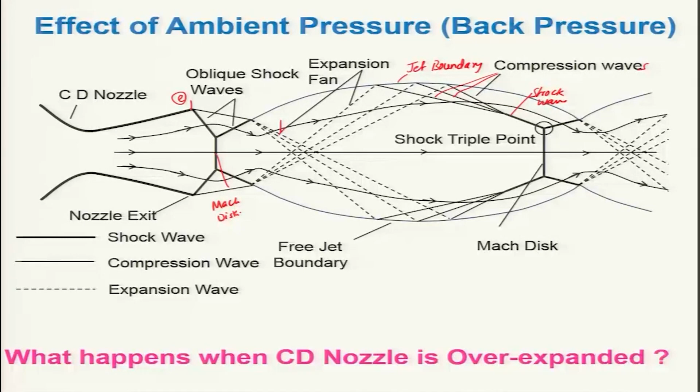expanded nozzle. So, one has to design in such a way that the over-expanded portion of the operation during its flight must be reduced, rather one will go for a little more under-expansion such that the losses will be minimized, and that is what is being done.

Now, let us look at what happens, because all this discussion we have done is considering that there is no boundary layer. However, there will be a boundary layer. It may be a very thin one, because the flow is accelerating, and this is your boundary layer. And when the shock is interacting with this boundary layer, as you know, pressure will be higher at the

downstream of the shock. So, there will be an adverse pressure gradient, and the boundary layer is more likely to be separated, such that there will be recirculation, and of course, in this condition the pressure will be such that it may have a higher thrust. However, this boundary layer separation may be asymmetric in nature, so that it will give you side thrust. So, this flow separation will be dependent on several parameters; let us look at them.

So, flow separation depends basically on the angle of divergence, the wall pressure, the local Mach number, and the local pressure gradient, and wall roughness also plays an important role for initiation of these boundary layer separations, particularly because wall roughness will affect the turbulence level. If the turbulence level is higher, then naturally the flow is less likely to separate, and it will bear the higher adverse pressure gradient. So, for that, of course,

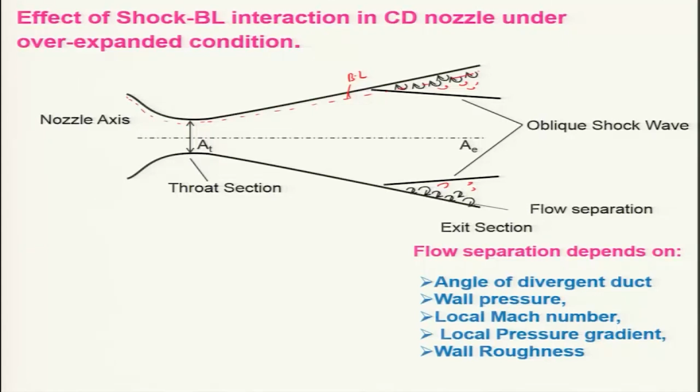while designing, a certain thumb rule is used, which is known as the Summerfield criterion for flow separation. That means PE by PA generally will be less than or equal to 0.4 to avoid flow separation, when PTE by PA, where PTE is basically PT2 at the reservoir, is greater than 16, for alpha, your nozzle angle, less than or equal to 30 degrees. If you look at this angle, this is alpha.

But this is a thumb rule, and it is also dependent on the local Mach number of the flow. So, therefore, people have conducted experiments and arrived at a semi-empirical criterion for flow separation, that is PE by PA is equal to 1.88 ME minus 1 to the power minus 0.64. That means basically it is 1 over that, so if Mach number is greater than 1, naturally this will be positive, so that the exit pressure will be less than PA.

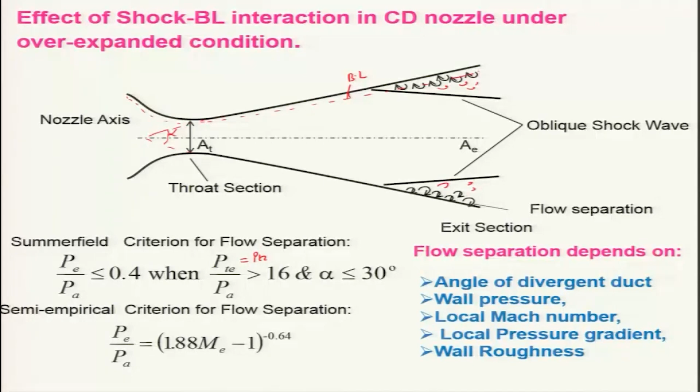This criterion is more robust as compared to the Summerfield criterion, but the Summerfield criterion is used as a thumb rule for preliminary design of the rocket nozzle, because you may not know the exit Mach number as such, so you can start with this, and maybe cross check whether it is doing well or not.

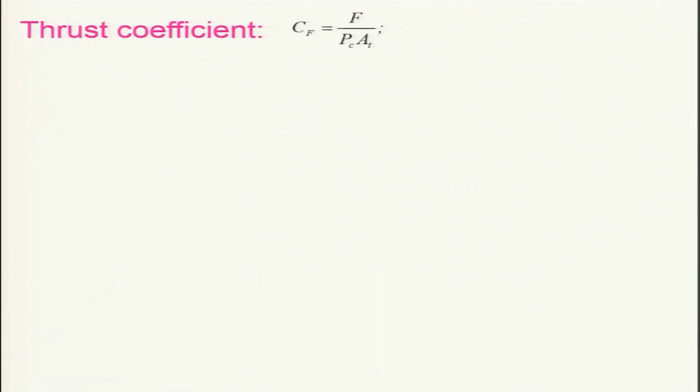So, let us now look at the thrust coefficient, what we had defined earlier. We know the thrust coefficient Cf is equal to the ratio of thrust divided by chamber pressure Pc and At, your throat area, and this At corresponds to the choked condition. So, let us recall the thrust equation for a rocket engine that we had derived earlier, that is the thrust F is equal to m dot P VE plus PE minus PA into the exit area of the nozzle.

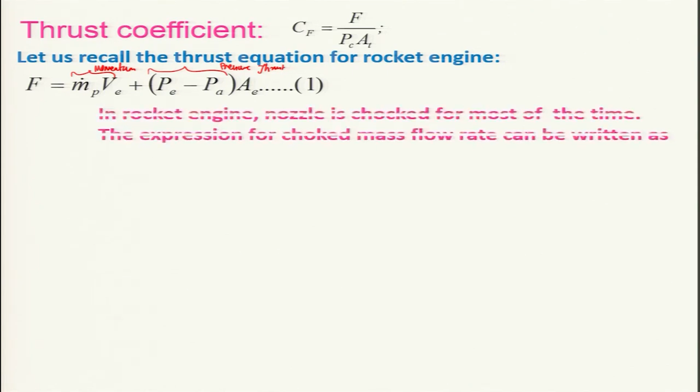So, this is basically momentum thrust, and this portion is your pressure thrust, as we have already discussed, and keep in mind that there is no inlet drag in this, or ram effect, because these are non-air breathing engines. And keep in mind that in the rocket engine, except during starting and shutting down, the nozzle is choked for most of the time.

The expression for the choked mass flow can be derived and written as m dot P is equal to PT2, the chamber pressure, times A star, your throat area at the choked condition. Keep in mind that under this condition the throat will attain Mach number 1, or sonic velocity, and this is aerodynamically choked, into root over gamma divided by root over R Tt2.

Tt2 is your chamber temperature, R is your specific gas constant, into 2 by gamma plus 1 to the power gamma plus 1 divided by 2 into gamma minus 1. This you can derive very easily, and we have already discussed isentropic flow through a variable area duct.

So, you can get very easily this expression, and we have already derived the exit velocity expression in terms of the temperature, that is 2 gamma Ru, Ru is your universal gas constant, Tt2, that is your chamber temperature, divided by gamma minus 1, m bar is basically molecular weight of the gas, into 1 minus Pe by Pt2 to the power gamma minus 1 divided by gamma. This expression we have already derived.

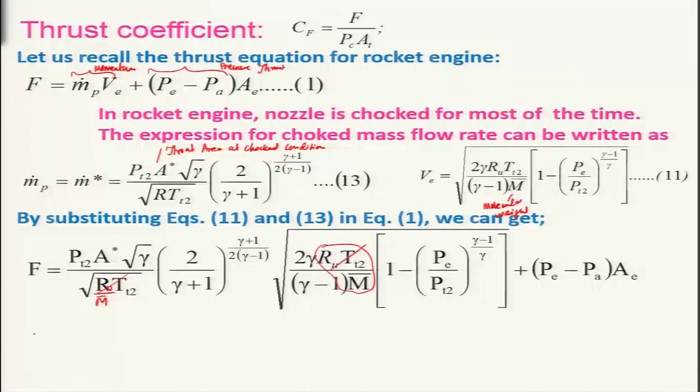And I can write that F is equal to Pt2 A star, and root over of that I can write as gamma, 2 by gamma plus 1, to the power gamma plus 1 by gamma minus 1, and this will be 2 gamma square by gamma minus 1, into 1 minus Pe by Pt2 to the power gamma minus 1 by gamma, plus Pe minus Pa term, and this is the expression you get here.

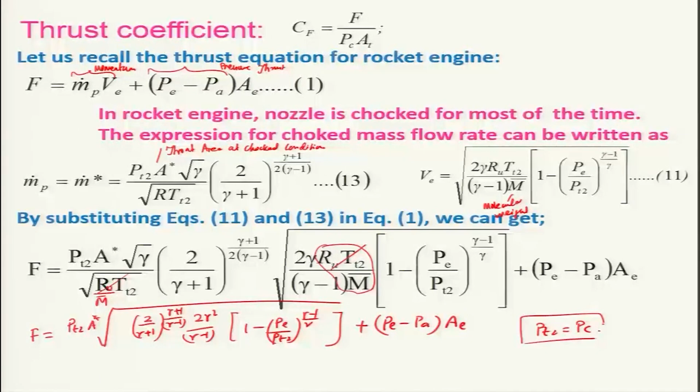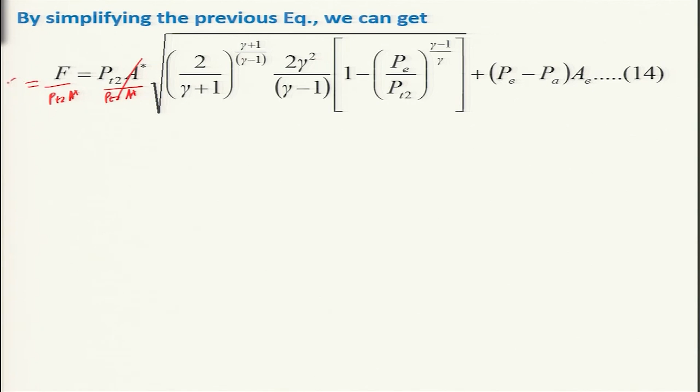We are going to find an expression for the thrust coefficient Cf. Cf becomes F divided by Pc A star, and keep in mind that Pt2 is equal to Pc, the chamber pressure. By doing that we can simplify this expression we have written previously. So, if I divide by Pt2 A star, it cancels here, and this is nothing but your Cf. We also have to do this here, that is Pt2 A star.

So, that becomes Cf, which is F divided by Pt2 A star, and this expression you already know, and this became Pe by Pt2 minus Pa by Pt2 into Ae by A star, which is also known as epsilon, the expansion ratio. Ae is the exit area of the CD nozzle, and A star is the throat area. You can see that Cf is a function of gamma, the pressure ratio Pe by Pt2, Pa by Pt2, and also Ae by A star.

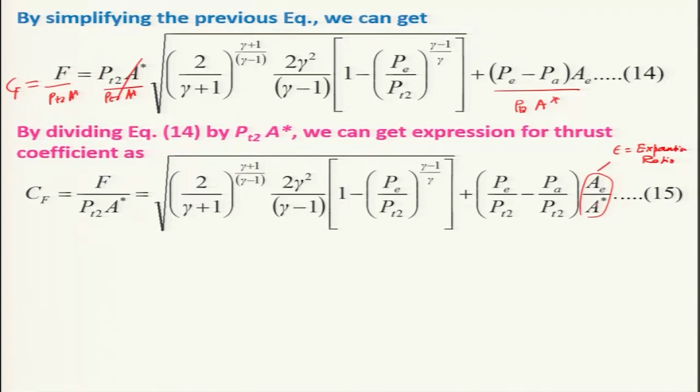This expression indicates the amplification of the thrust due to expansion in a CD nozzle as compared to the thrust if Pt2 acts on the throat area alone. For example, consider this CD nozzle with chamber pressure Pt2, and this is your throat area A star under choked conditions. This is the velocity coming here, such that Pt2 acts on this area A star, and that gives a thrust.

Due to this divergent duct, the thrust will increase, and that gives the amplification, how far it goes beyond what it would be if the pressure Pt2 acted over the throat area or choked area. So, this is the indicator of amplification of thrust. As I told earlier, Cf is a function of Pe by Pt2, the pressure ratio across the nozzle, the atmospheric pressure with respect to the chamber pressure, Ae by A star, the expansion ratio, and gamma.

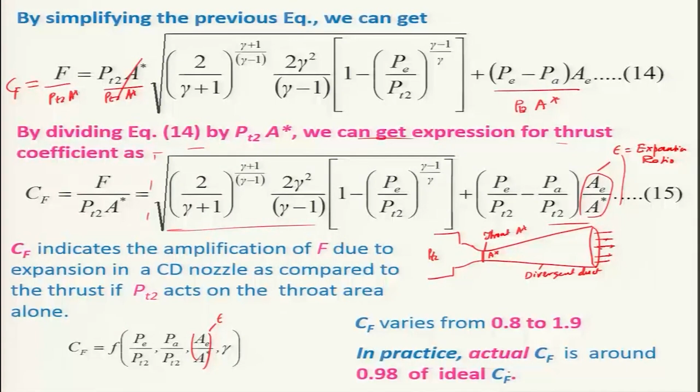So, the actual one comes from the measurement, and actual Cf is around 0.98 of the ideal Cf, meaning about 2% error if you just take the theoretical value. It is really not much, but you always have to rely on experiment to see what is happening. With this I will stop. In the next lecture we will discuss this thrust coefficient further.